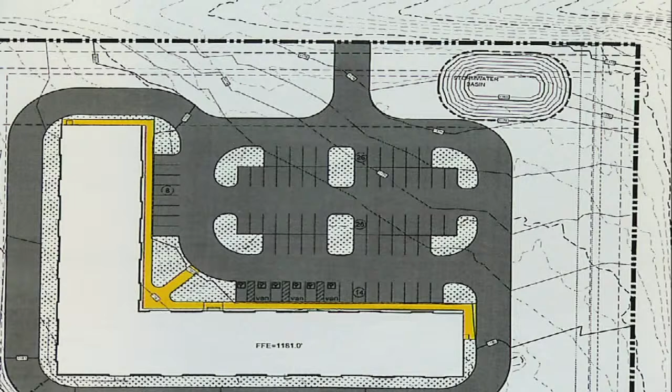Our traffic will not go through the neighborhood; we go directly to Fort Street. We've done studies with our engineers about the best place to put that drive so it's the safest for people entering and exiting off of Fort Street. Part of our plans will be to create turn lanes on Fort Street, both directions, coming east and west.

We had a neighborhood meeting on December 27th where we were able to present this to the neighbors and get some feedback. One requested item was privacy fences, and what we committed to at that meeting was that anywhere in the existing fence line where there's a gap, we would fence that in if the neighbor so requested, to create privacy for their yards. We also have a pretty extensive landscaping plan.

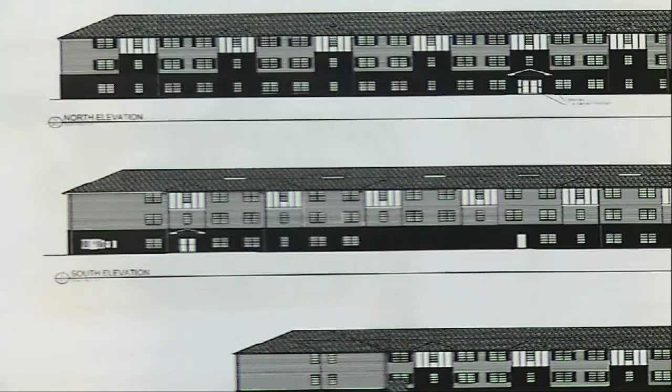Let me first show you our building elevation. So there's our building elevation. We have quite a bit of brick, different elevations, different depths on the building to create an attractive product that we think will fit into the neighborhood and serve our clients well. Beyond that, one more exhibit here I'd like to show you.

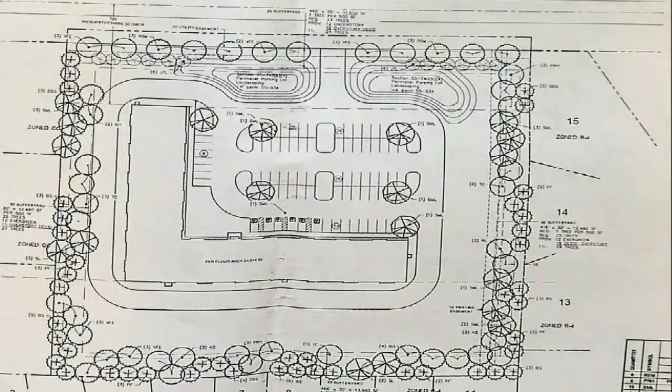Be more than happy to answer any questions you may have. Some other items that came up from that meeting I wanted to address: there was a question about whether there's a need for more senior affordable housing in Omaha, Nebraska. We commissioned a study over the summer showing the Omaha metro area needs 7,800 senior affordable housing units, and we currently have 2,600. So there's a significant need for senior affordable housing in the metro area right now.

I just have one question for you. How are you going to verify residents, and how do you define senior living? It's 55 or over. So how will you verify residents are 55 or over? I assume you're going to get birth data, and you're going to limit it strictly to senior living only, correct? Yep. With the affordable housing piece, we gather a lot of information beyond a standard criminal background check, credit check, and landlord references. We also do significant compliance work totaling up income levels to see if they qualify for the affordable units. Hopefully that answers your question. Yeah, it does, thank you.

Rob, have you built one of these here in town before? Yeah, we have about 350 units in Omaha, from Millard Senior Residences on 156th and S Street, to Kidder Heights at 60th and J Street, Sorensen Heights at 56th and Sorensen, 23rd and Q, Southridge Senior Living, and on 14th and Castelar, Hillside Senior Apartments.

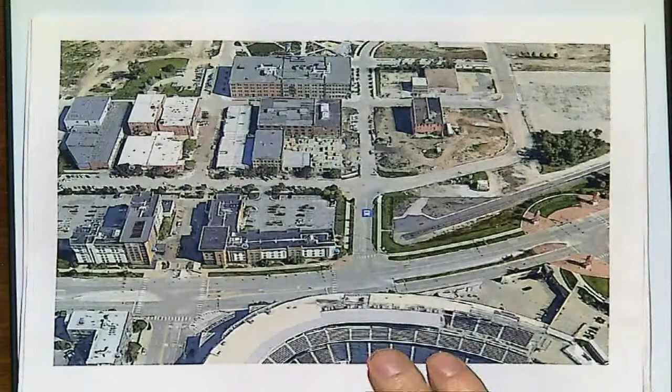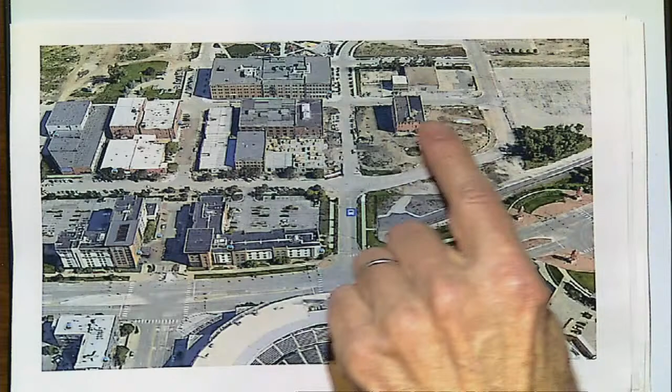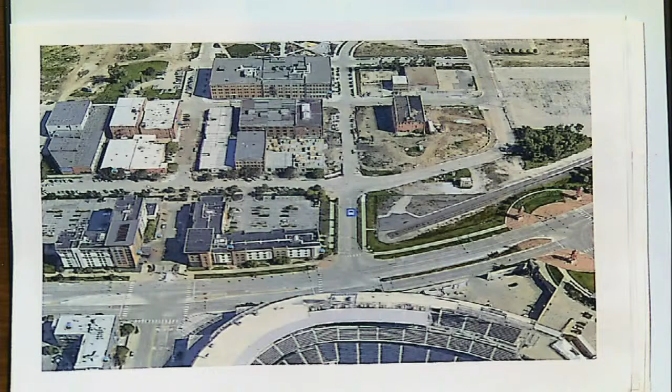Don Seaton, Omaha City Planning Department: I'll begin by getting you oriented here. We have a view looking north from the Schwab Ballpark. This is Cuming. The project site is 2 vacant lots adjacent to 12th Street on this block that's largely vacant, with one historic building kind of in the middle of it. It's the western edge of that block, to the southeast of 12th and Nicholas. It's in the Millwork Commons development where you've seen a lot of activity recently.

This project will be a 5-story mixed-use development with about 12,400 square feet of first floor commercial space and 78 market rate apartment units on the upper 4 stories. Included with the development of the site will be 16 angle parking spaces developed along the 12th Street right-of-way, along with appropriate streetscaping.

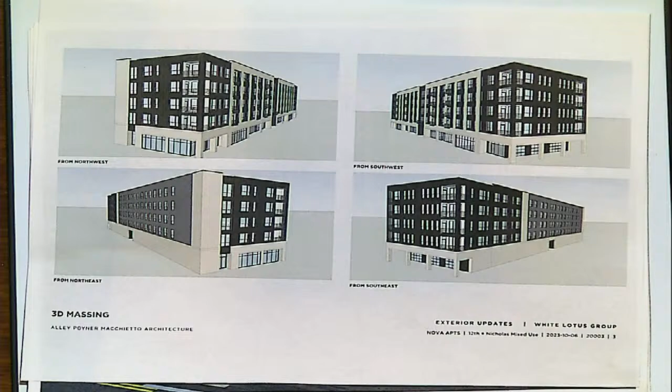This project is in an NCE zone, so the design of the public improvements and the design of the building have been reviewed by our urban design team and are in compliance with that NCE zoning. The applicants intend to lease about 120 spaces from Park Omaha, who is in the process of developing a public parking garage immediately north of this development site. The developer of this project is NoDo LLC, managed by the White Lotus Group and Arun Agarwal.

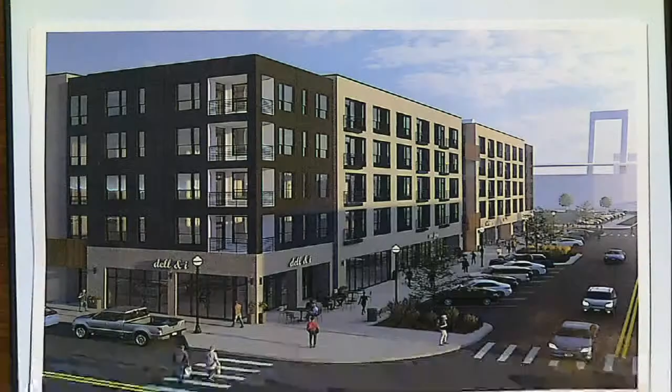This site is in an extremely blighted area, so it's eligible for a 20-year TIF term, and it's also in the influence area of the urban core housing and mobility plan area, so this project will be making a contribution to the construction of the streetcar line. Total project investment is a little north of $19 million. They're requesting $1,902,663 in TIF support, tax increment financing support. This project meets the required criteria of the city's TIF program. It's an appropriate land use for the area, and it complies with the goals of the city's master plan. We ask for your approval.

Thank you, Don. Any other proponents? Drew Sova, 2410 South 186th Circle, Omaha, Nebraska 68130. I'm here on behalf of White Lotus Group, here to pledge my support for the project. Excited about the area in and of itself. It's an up-and-coming area and district with Millwork Commons. We're excited to potentially be a part of it. We appreciate Don and the TIF committee's support here, and happy to answer any questions about the project.

I just have maybe a couple quick questions for you, if you don't mind. Don referred to the parking garage immediately north - is that going to be just north on Nicholas Street, right across the street there? That is correct, yes. And have you already had discussions with the city with regards to leasing those spaces? We have, yes.

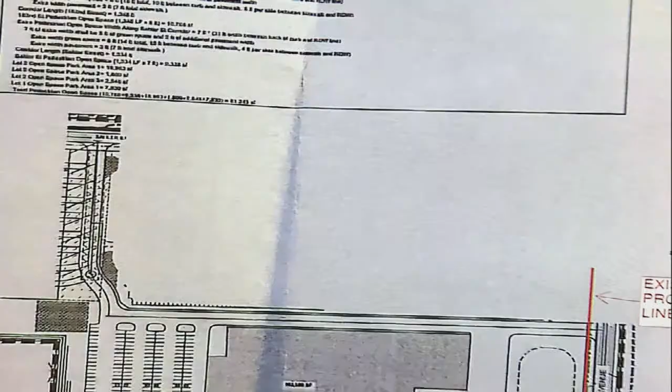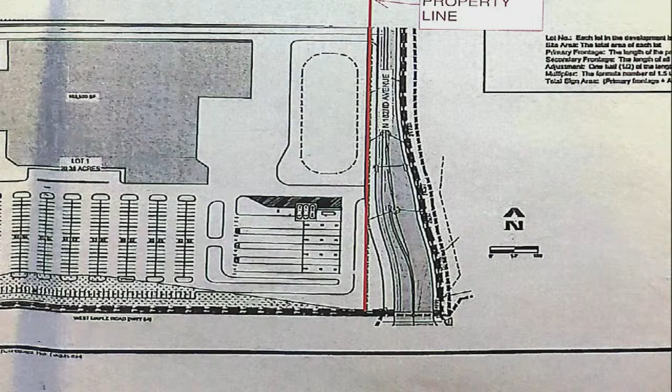On this exhibit, the red line indicates the property line between the adjacent property owner and the proposed development. As you can see, as drawn here, the road is drawn entirely on the Ralph and Marion parcel. This is the access point at the existing stoplight. We understand that's not going to move, and we're in agreement with that access point and the location to the north. Our discussion is more on where this road could possibly shift, or the north-south location of that.

Can you zoom out a little bit? Jill, on top, you can move the dial. There you go. Perfect.

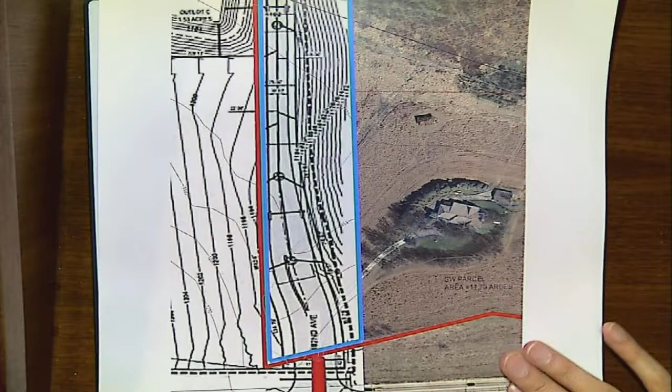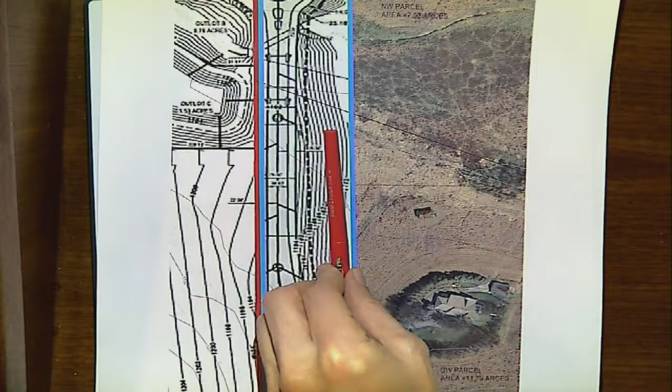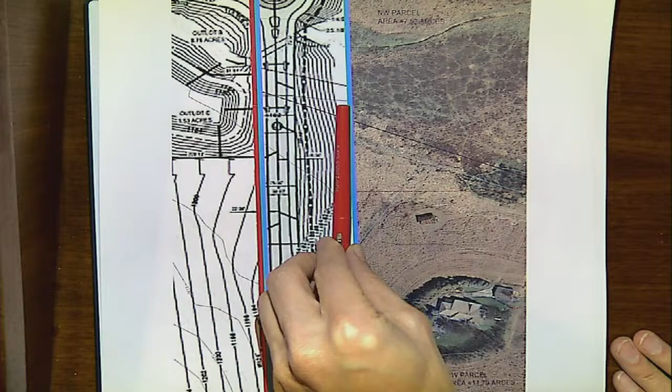So this is an aerial with the adjacent developer's plan overlaid on top of it, and this is the access point down here. As you can see, as the road goes to the north, it's entirely on Ralph and Marion's property. You can also see there's a significant embankment placed onto Ralph and Marion's property, raising the elevation by approximately 22 feet from where it sits today. Ralph and Marion's property through here is very flat. Currently the hillside is entirely on the adjacent parcel, and they're regrading to push that hillside over onto Ralph and Marion's property, creating essentially an 80 to 90 foot area of undevelopable land with that newly found hillside.

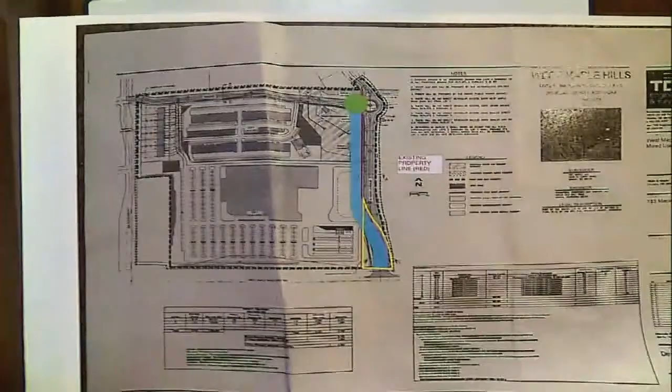Last one. So this is showing the road as it's currently drawn going north, as we discussed, but I drew in blue. Is there a possibility to adjust the road so it bends over and the proposed roundabout on the northwest corner of the property, northeast corner of the development, is shifted to the west?

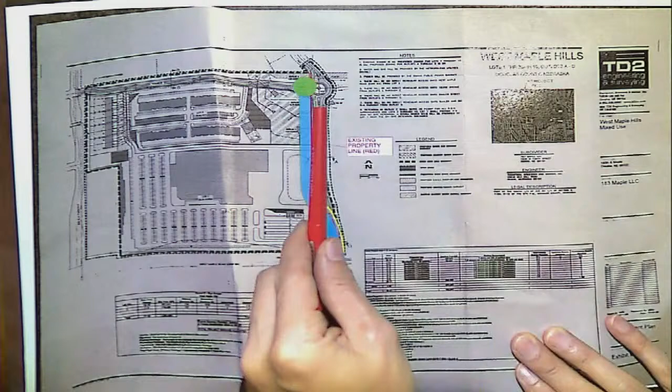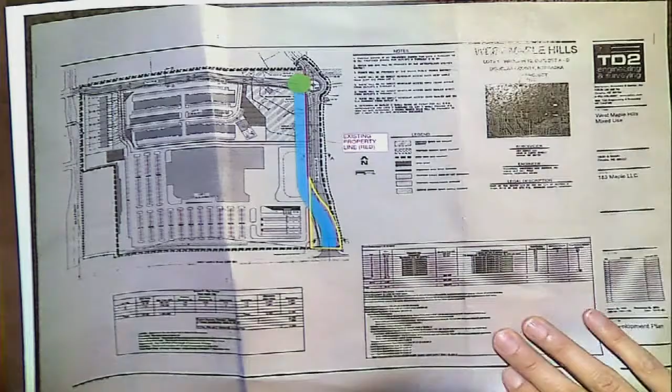I did play around a little bit in CAD the last couple days. I just found out about all this recently as far as the proposed road location and proposed road vertical alignment, so I didn't have ample time to work with the adjacent developer. But our request in front of the commission would be to add a condition requiring the adjacent property owner to come to a mutually agreed upon location, both vertically and horizontally, of 182nd Street as it goes to the north.

So Joel, moving that over, could you leave that up there for me, please? Yep, moving that over, you're still going to have a bank going down. It's just going to be taking less room. Is that kind of where you're going with that?

Yeah, I think the preference would be to lower that road down so that it works better. Right now it works really well with the property owner to the west, but it doesn't work great for the property owner to the east for future development. So lowering that down, coming to a middle ground on where it sits today as far as elevation, so it impacts both properties equally for both location vertically and horizontally.

Thank you. Any additional questions for Joel? Joel, how many acres are left?

If that road is placed on your grandparents' property, how many acres would be left on their property then, do you know? So currently there's 35 acres on the property, but there's a large portion that is the creek that can't be developed. So somewhere around 25 acres total is developable in my rough calculation.

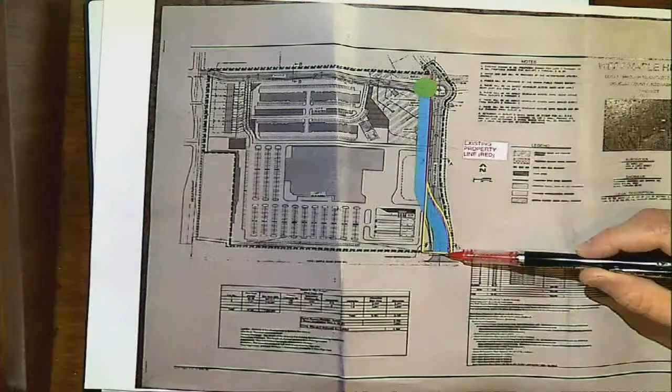I think he answered them. My only other question would be the placement of 182nd, whether this happens or not, is right there on their property in the future, regardless. Yeah, correct? Well, that's a fixed point. If this property came in first, I would suspect it would just run basically where TD2 is showing it.

So that's always a challenge. We have the master plan requirements. This has to be a roundabout for reasons I could get into if you'd care to know. This is a through route going all the way east to west from 180th to 192nd. It's a parkway, that's a fixed point. So that's the challenge, when we don't get these properties to line up neatly with the master plan requirements, there has to be an acquisition from a party that maybe isn't thrilled about taking part in a land transaction. So we try to balance those sensitivities with the city's master plan requirements and infrastructure requirements.

Any other questions for Ryan? Thank you, Ryan. Thanks, Ryan.

Scott, we asked Ryan to come up. Were you done with anything you wanted to say? I didn't give you the opportunity to say anything engineering related. Yes, I'm done. I don't have much knowledge in that area, and our engineer, Doug Kellner, is on vacation, so I miscommunicated with him. Otherwise he'd be here. Thank you. Thanks.

Any additional thoughts, questions from the board? Well, the only thing I'd say is, I don't think you're opposed to the development, it doesn't sound like, and I'm hopeful that you guys can find a common solution. I don't know what that is.

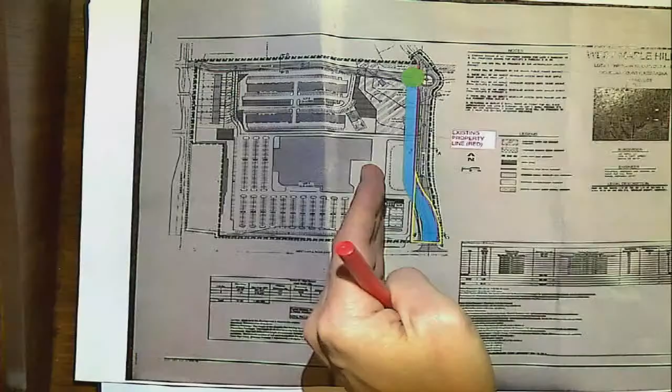And currently, as shown, this solution would be actually shifting the road entirely onto the adjacent property owner. Is there a solution where we could just shift it 35 feet to the west, where it straddles the property line? It did kind of appear, from an engineering standpoint, without having all the data available, that maybe that roundabout could shift 35 feet to the west instead of what I've drawn here, which is 70 to 80 feet to the west, and still be able to match in and meet all the city standards to the north.

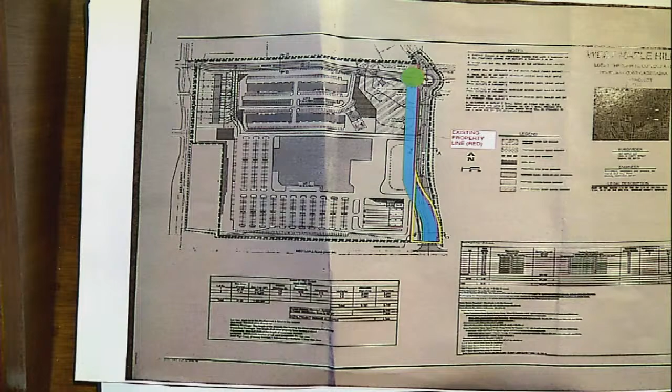That would encourage you to get with Public Works too, with regards to that particularly. Absolutely, as well. And that was one of the questions I was going to ask you, Scott, too: why didn't you initially have TD2 draw the drive onto your client's property instead of their property, in this configuration?

But you guys talk about that. It's probably nothing we can get into today. But yep, so we just appreciate a little bit stronger condition of approval to make sure that.

Okay, so I think the situation here is everybody seems to be in favor of this project moving forward. The number one condition on staff's recommendation is exactly that the two parties resolve and find common ground so that you can make this happen. You both want it to happen, you both benefit from it. And if you can do that, I think the recommendations put forward should give you the latitude to be able to do that.

Could something be added to say something about the actual vertical and horizontal alignment of the road, instead of just the acquisition of the property necessary for the road in that condition? And then we become the developer, I think. So, Eric will address that.

Traffic dictates slopes and angles and all that kind of stuff. I think that in itself will resolve that issue, in my judgment anyway.

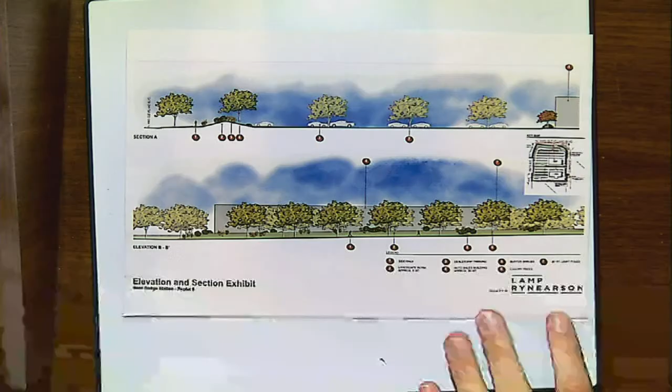Can you give us a broad idea of some of those issues that have been brought up? Yeah, the one I got most frequently was about the proximity from the residences and HWS Cleveland Boulevard. So we could turn on the overhead here. In the recommendation report, there was a recommendation written for screening.

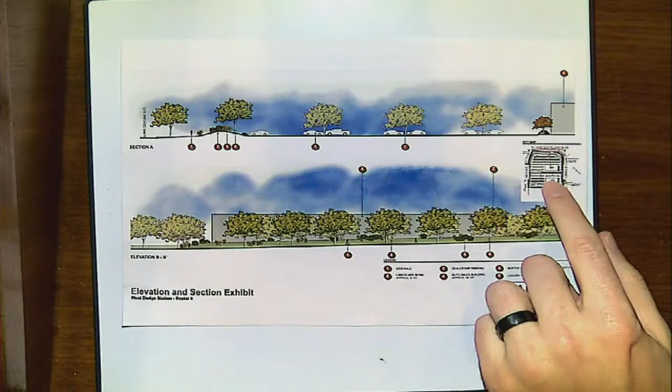In our original MU, we had matched the landscaping condition that was in the previous mixed-use agreement. Written in the rec report was, I believe, a 6-foot barrier of some sort, which can be trees. We had actually proposed at the public meeting what you're seeing here. HWS Cleveland is right there, which is hard to tell, but it's located right on the north side of the property. We had proposed a berm with some shrubs and trees on top to help with headlight screening between the residences and the project.

So that was probably the number one item brought up for coordination. Also, traffic, safety, and lighting was brought up at the public meeting, which we can talk about further if you'd like.

But those were a lot of the big ones. So were you guys agreeable to maybe putting in a berm to answer some of the potential issues they had? In the rec report, it was mandated that screening be there, but it doesn't say anything about a berm. This was an option we proposed. There were also other options to accomplish that same screening, but this is what we had shown at that public meeting. So the rec report just said screening, which we are more than happy to comply with.

Okay, but I want to be clear on your definition of screening. Is it the berm? It could be a berm, but we don't have design plans to bring today. This is step one in the process. We are not coming in with any follow-up plans in the immediate future. This is an option to accomplish low-level headlight screening along with other options. We were proposing this before, and now it's written in the report to have the screening, and we are happy to comply. Let me ask a different way then: is a berm a reasonable request? I believe, yes. Okay, that's what I needed to hear.

So I'm just right off of HWS Cleveland Boulevard right here. Since building my home over 10 years ago, I have understood that the lot would be developed someday. And as a good neighbor, I feel we must be responsible to the landowner's proposed use.

So I have no objections to the rezoning of the property. However, I do have two principal concerns as the proposal is presented today. First is already been discussed, but the screening right along HWS Cleveland Boulevard, which is right here.

And I'm just apprehensive about how this development will affect my property value. Suppose the look and feel across the street is unsightly and swarming with headlights, vehicle activity. In that case, it will not only serve as an annoyance to myself and the neighborhood, but could potentially deter future home buyers from purchasing our properties.

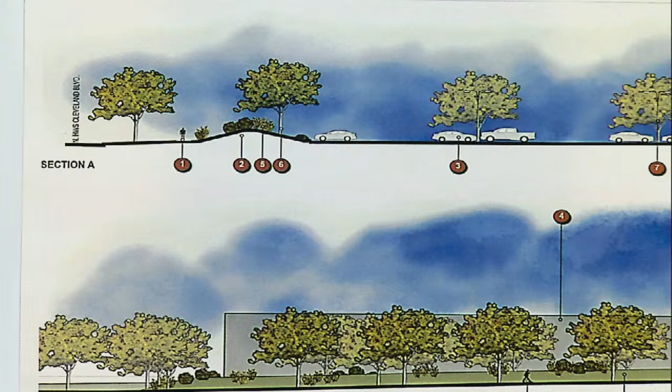The second, living in this neighborhood for over 10 years, I'm next to a bunch of auto dealerships, but not immediately next to them. So there's a continued issue that always seems to happen, where the truck drivers unloading cars are parked in the middle of the street. They don't pull into the auto dealership, they park in the middle of the street.

I am concerned that these truck drivers might park in front of the school or on HWS Cleveland Boulevard. So it's hard to drive around these drivers. You kind of have to poke around and make a dodge for it. So sometimes it's a blind pass. And also, they're unloading in the middle of the night at all hours of the day, slamming cars, etc.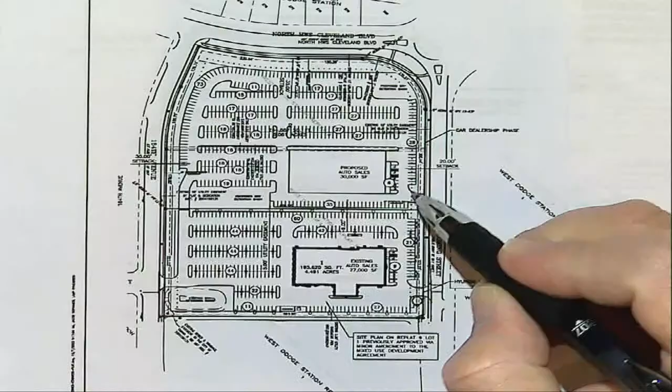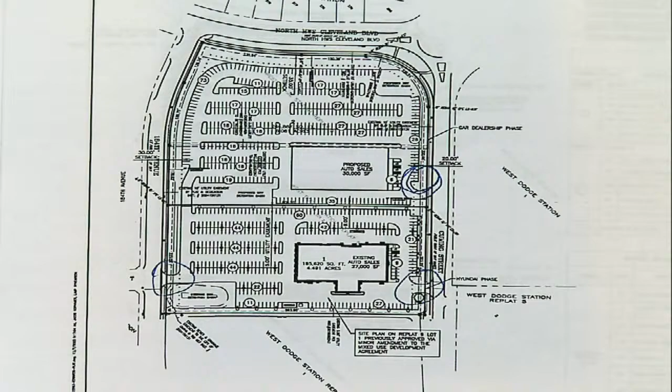So when I attended the meeting on December 21st, Caleb and Brett presented the plan as only having one entrance here, and that they would be sharing the two entrances down here of the Woodhouse property that is currently under construction. But when I review the proposal that was uploaded to the online board's website, it did state that two unshared vehicular access points are proposed, one from Cummings Street and one from 184th Avenue. So that would allow for another entrance right in front of that school.

And if you're trying to drive past a truck, I have a big concern that some child is going to get hit because people are not always going slow, and if they try to get around one of those trucks and there's kids moving about or schools going in or coming out, it could be a safety concern. As well as there's just, it's harder to get in and out of my house. So those are the two items I had today. Otherwise, I have no problem with there being a car dealership in front of my house.

I think it's better than an apartment or an office building. So the only other thing I had was our HOA president, John Gilmore, had sent in a letter, and I just wanted to make sure the board received that.

Got it. Awesome. Well, thank you for your time today. Dan, by the way, it's not a rezoning. Okay, it's just a amendment to the mixed-use development agreement. So, okay, that's all right.

Are there any other proponents wishing to speak? Hold on, Caleb. Okay. Yep. Proponents we're looking for. Okay. You're gonna be opponents. All right. I'm gonna, no more proponents. Do we have any opponents? Now you can come forward. Are you guys opponents? My apologies, I can't hear very well back there.

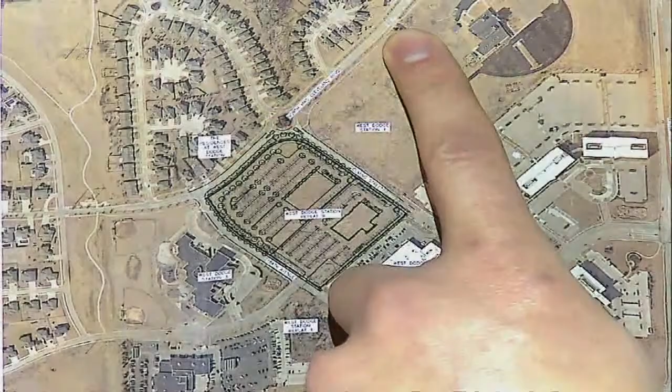I think a really big concern—I've talked to a lot of my neighbors. We have a social media page where people can post and discuss this issue. A lot of people are concerned with just the proximity to the school specifically, and then also these neighborhoods. This lot is further back, it's not right on the house lines, it's not right on these sidewalks where our kids, our 4 or 5 year old children, are walking every day.

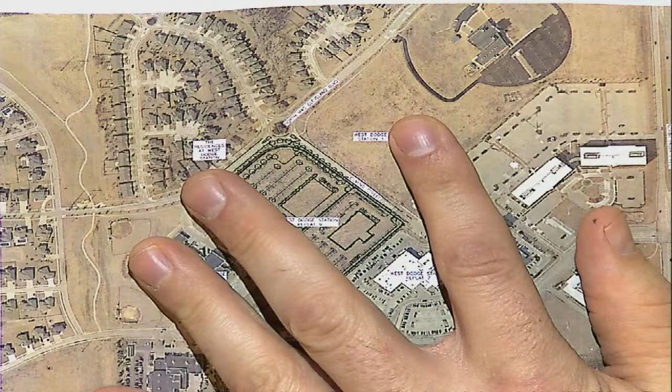It's one thing to have how many, 5 just on our side of 180th. There's 15 other dealerships on the other side of 180th. At some point, it feels like it's not mixed use. It's just the 19th car dealership, you know.

And I understand what you're saying about not rezoning, but whether we call it a major amendment or a special use, I'm not a lawyer, I don't know the exact verbiage. I did attempt to read the municipal code. You'd probably be better at describing exactly what it is, but this is like right into a neighborhood. The majority of these other car dealerships are at least set back. They're not between the school and the neighborhoods.

It's just dealership after dealership. The same group just developed this lot. At some point, honestly, an office building, a medical office, something that serves the community as mixed use, to me, would be a lot more compliant with the intended purpose of mixed use. And again, I'm not a lawyer, but my understanding is that there's certain percentages of various properties, like whether it's fast food or something, there's a limit on the percentage of mixed use that can be fast food. Is that correct?

And here we are just shoving dealership after dealership into this. You guys have probably driven by, it's like a mecca of car lots out there. But at some point, now we're getting into the neighborhood. And that's the residents' concerns. That's every parent that I've talked to—the noise of the PA system, the lights, the traffic, everything associated with that, and then being right next to a school. So we are strongly against this.

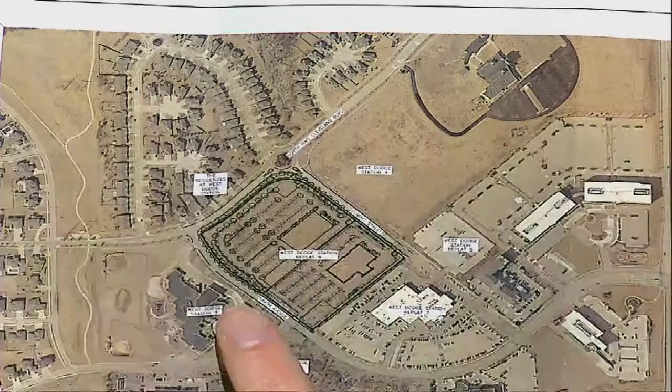Caleb, Brett, either one of you want to come up and discuss concerns - you probably heard these concerns. I just want to clarify a couple things quickly. We've been working with city staff on the location of the entrances for a little bit now, and the direction we were given, just to clarify, is that there would be no driveway allowed off of HWS Cleveland or off of 184th, which is the school side. We would only have access to the shared use driveways that Woodhouse is already building currently, and then we would have a new driveway off of Cumming Street.

That was the direction given from city staff - those would be the allowable connections to public streets. I completely understand the proximity to the residences and West Dodge Station Elementary and how a driveway could negatively impact them. Also, for the property itself, it has wider setbacks than standard: a 35-foot setback off of HWS Cleveland, I believe a 30-foot setback off North 184th Avenue, and then a 20-foot parking lot setback. So the parking lots are inset, with a row of trees in between.

So there is more than a standard amount of distance between the parking lot for the auto dealership and the public sidewalk. We completely share the same concerns about the safety of students going to and from the neighborhood, and as Mr. Edwards mentioned, we want to be very good neighbors to everyone with our use and their routines on a daily basis. Other than that, I'm happy to answer any additional questions.

Hey Caleb, I'm sorry - where, they asked about drop-offs and where the trucks would be, dropping off cars and unloading at all times of the night or in the morning. Do you know where that's going to be? Will it be in the lot or still on the street?

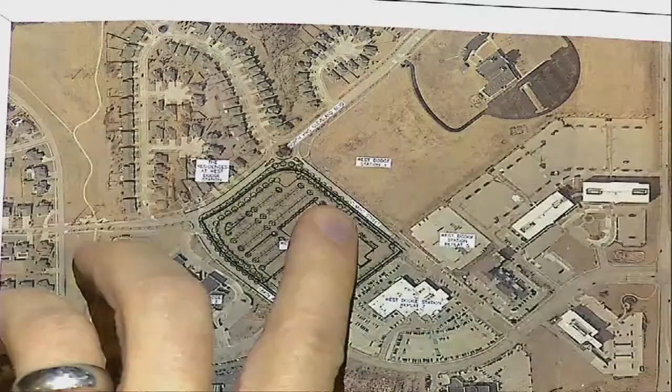The other option would be to allow for an off-street area on this road. That would be the front of the store, and that's where the trucks would be - they would not be on Cleveland. Truck drivers don't take any more steps than they have to, so they park right in front and unload right in front, and we work quickly to get them gone. But that would be secondary. The primary concern is just to be good neighbors, because that was brought up, and having driven around there, I could see the issue with the way the roads are - you could come up on the hill and have somebody unloading a car unexpectedly.

What are your hours, and are you closed on Sundays? We are closed on Sundays. Our hours are till 8 in the evening, and on Friday and Saturday until 6. What time do you open, 8 in the morning? Our service department is open then too, and people do drop off cars at 7 in the morning.

If you had a good year, how many cars do you think you would sell out of there if there was a car lot? For our organization, we generally try to have brands and size the staff to sell in the 600 cars a year range. We like an even split between new and pre-owned, so about 300 and 300 for the year. So still not a big traffic draw as far as cars coming in, like a restaurant necessarily? Well, we wish we had more traffic, but auto use is generally not very high traffic. We work hard to try and have more traffic, but you're correct - it's much lower traffic compared to something like a Chick-fil-A.

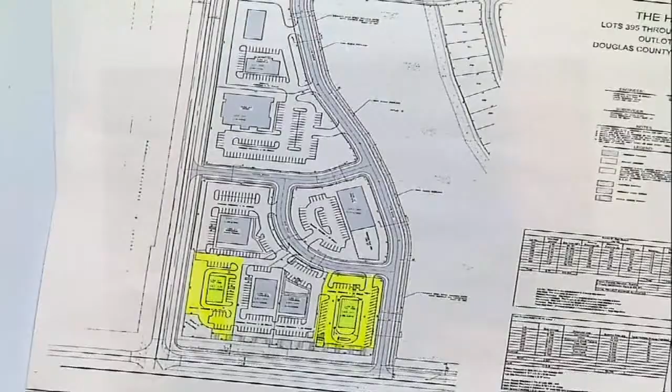We're requesting the ability to have 2 fast food restaurants on 2 lots, and that's really the idea. The 2 lots we're talking about are lots 398 and 401, along State Street. The idea isn't so much to comply with the percentage per se, or exceed it per se. It just seems kind of odd to have a mixed-use development where you only have 1 fast food restaurant. Where is that really a destination for people to go to if there isn't a choice?

I think the idea is that this isn't precedent-setting in the sense that everyone's going to come in and blow out the 12% limitation on fast food restaurants. Why? Because if they could show the same things that we have in this particular case—as you know, land is unique, its characteristics are unique, every site and every development's different—the fact that you have only 10 acres of a mixed-use area out of 60 acres, and the fact that you have a creek that limits its ability to be developed for mixed use.

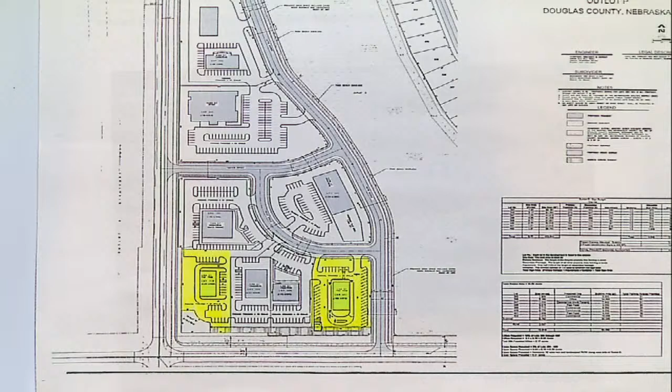The percentage in this case, if you ask me, is almost irrelevant, because you're going from 12% to 19%, but that's not really what's the deal here. What really is the deal here is to at least have 2 lots available for fast food restaurants.

So you have some demand being met here. You don't go to 168th and State and have one choice, it's whatever, and there's nothing else.

My thought is, under a mixed-use development—I've used this standard before—mixed-use developments are really zoning by contract, right? It's by agreement. So we can't go to the Zoning Board of Appeals to show there's a practical difficulty or a hardship.

But if you apply that same standard here in the mixed-use world, you kind of have that situation. You have an intersection that has 60 acres available, but you only have 20 really because the other 3 corners are developed for residential uses—there's no chance there'll ever be mixed use, commercial, office, or anything else. And then you have a creek that reduces this further to 10 acres.

So to me, this concept of a practical difficulty or hardship, I think, doesn't make this precedent setting, in the sense that people aren't going to come in and say they have a 40-acre deal and they want to blow the 12% fast food restaurant limit out of the water.

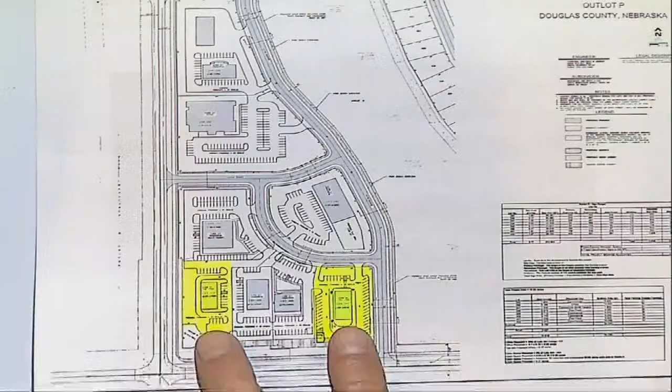That's the thought. I understand the recommendation is for denial, but my thought is to always keep an open mind and have the discussion. And again, it's more of a policy, just a policy type discussion that we can have here.

Again, I don't think this is precedent setting because I don't think anyone else can come in here with these facts. And if they do, hey, great, right? I think it would be very strange and very odd if it did occur, but this is where we find ourselves. So I'm happy to answer any questions, happy to have the discussion. That's my argument.

So Larry, did your clients know that they were buying property with a creek on it? Well, of course they did, and they understood the 12% limitation on fast food restaurants.

But the idea is to really look at this development and apply that sort of Zoning Board of Appeals standard of a practical difficulty or hardship, which you can't do in the mixed-use arena because it's zoning by contract. We did this before on the Hilton Garden with their signage.

They were sitting in a hole and we let them have a sign on the peak, if I remember right. We used that same type of analysis—that there's this practical difficulty or hardship that is not in the mixed-use world, but that same concept or principle can be applied to allow someone to adequately develop and utilize their property.

I don't think this is precedent setting. I don't think people can come in and point to this 168th and State Street and say, I have 40 acres and I'm going to blow the 12% out of the water—I want 15 fast food restaurants because I can, because of this case.